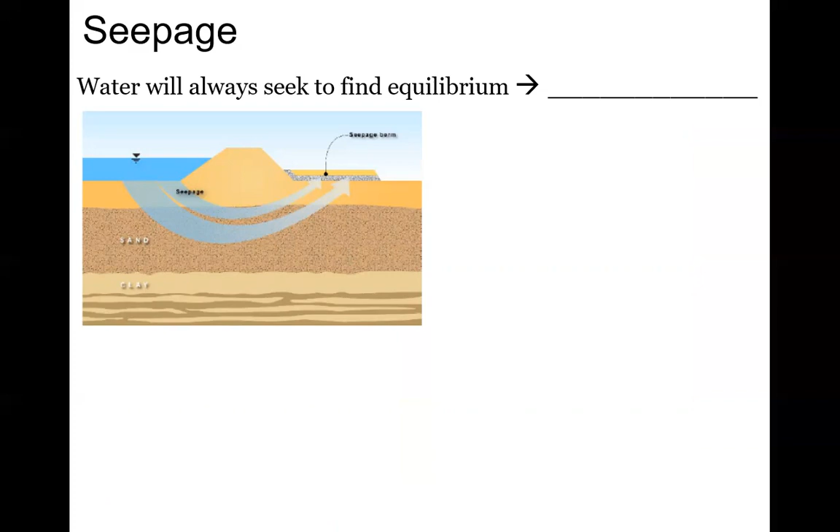So what we were talking about before the exam last week, we know that we can measure the flow of water through soil, and water will always seek to find equilibrium - it always seeks to find this hydrostatic condition.

And we talked about the seepage, the flow rate of soil using this equation. This is the flow net equation, right? And this allows us to find the Q value. The Q value is the flow rate of water.

Now you can probably imagine if we increase this flow rate too much, we would have a flow rate of water that could potentially dislodge the soil particles, right? Like a garden hose - if you spray a garden hose on the beach and the sand is super dense, or the flow is really low, it's not going to do anything. But if you increase the flow rate, then you could potentially have the migration of soil particles.

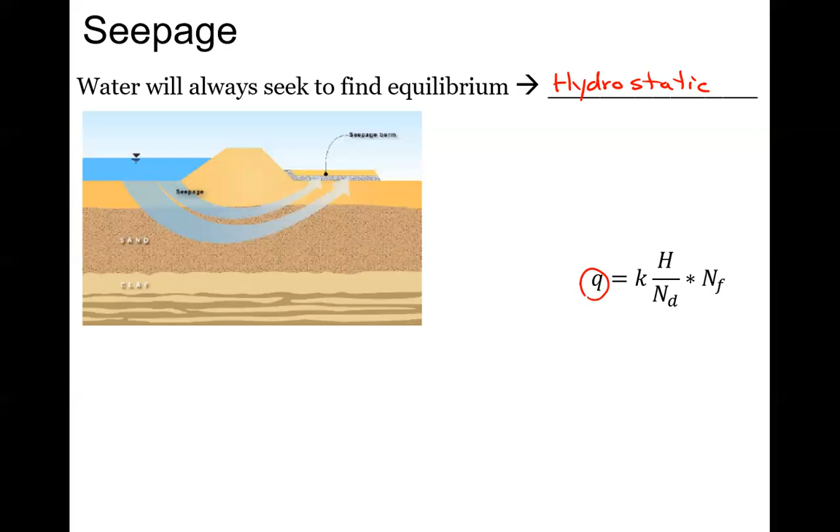So this is really important in geotechnical engineering, in terms of a few things we've mentioned before, like quicksand - even though the movie version of quicksand is different than what is actually happening with quicksand. But liquefaction in earthquakes, this is all due to the movement of water and the dislodging of particles.

There's another issue called heave, where we actually have the water stresses moving a chunk of soil along, like the weight of that is a little bit heavier, and the weight of a chunk of soil is matched by the water pressure, and we'll cover that.

But the big thing that this affects is the intergranular stress. So the intergranular stress is when we zoom in on a chunk of soil and think about the interaction of all these soil particles with each other. These little tiny chunks, almost like aggregate, are all interacting and contacting with each other, and this greatly affects the strength of the soil.

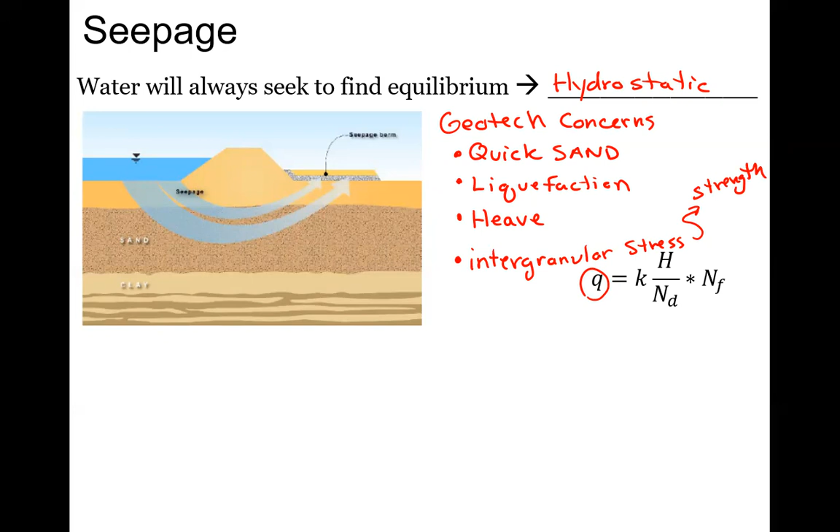So what we want to eventually do is construct something on our soil - as geotechs, we want to transfer the structural loading of a bridge, a skyscraper, a road, whatever, into the soil and through the soil. So we need to estimate the soil strength and the ability for that soil to hold whatever we want to load on top of it.

So the flow rate stuff, we've already seen that before, and that's the flow rate shown there. So we have a seepage force, and the seepage force is technically this drag force that develops at the interface between flowing water and the soil particles. We could zoom in and think on the granular level that we have a water molecule hitting a soil particle, and there's something holding that soil particle intact.

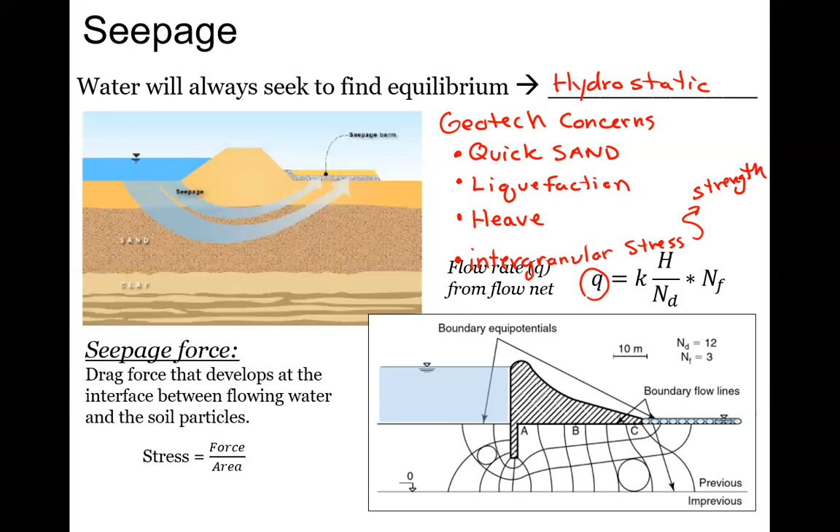So we know that seepage force, what we usually care about is stress. The question is, what is causing this soil resistance? What is causing it is intergranular stress, and we determine that intergranular stress through the in situ stress.

Think about it like trying to pick something up, like a stack of weights or just one weight, or say a book. If you have just one single book, it's easy to pick up, you just match the weight of that book. But if you had a stack of books going all the way up, that would be much heavier to pick up.

We see the same thing with soil and depth. The deeper the soil particle is, the more soil there is on top of it, the higher the in situ stress, and the more difficult it is to transport that soil particle at that depth.

Let's look at an imaginary cross section. We take Jacksonville and cut a big slice of pie down the center. We see a sand layer, a clay layer, and our little house at the surface. Let's zoom in at this little make-believe circle here.

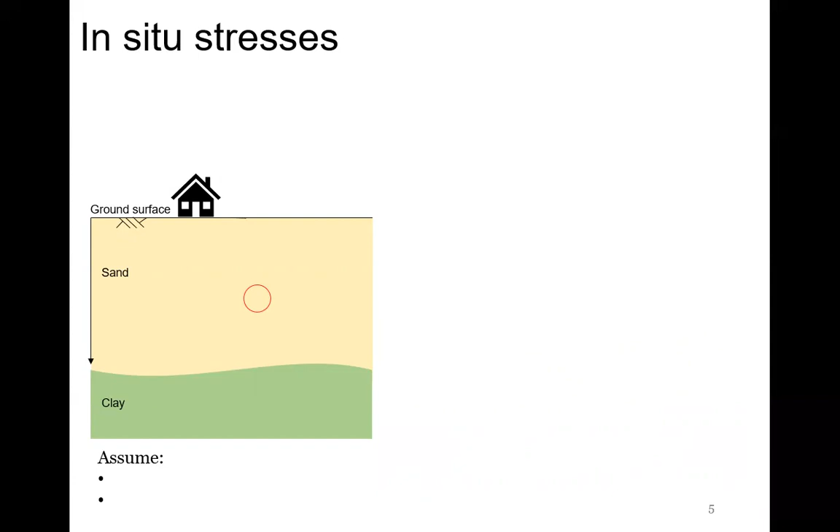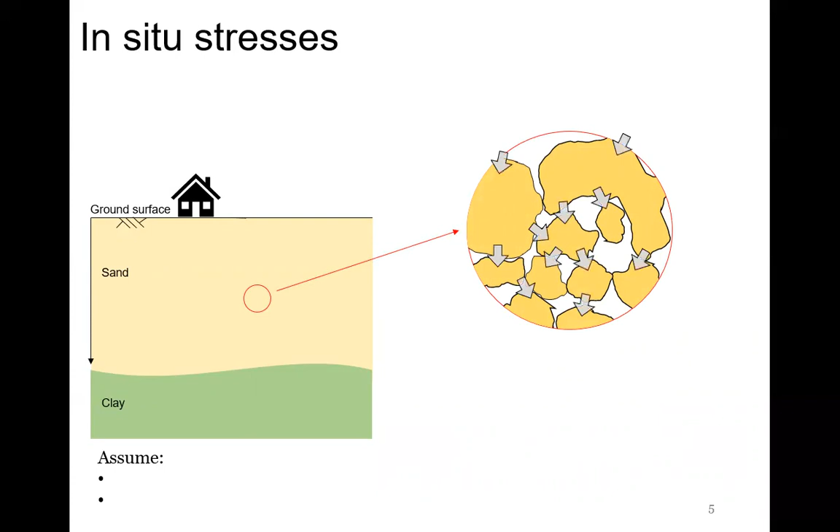Even though we picture soil on a macro scale like this, if we zoom in and look at it on a micro scale, what we'd see is a bunch of interlocking particles. This is just some arbitrary volume, let's say this circle is like a unit volume. These interlocking particles all have points of contact.

On the skeletal level, it's very difficult to analyze this stress. It's not like a method of joints or a truss where you can easily measure the cosine between all of these and do the math to determine how force or weight is transmitted from one end to the other. So most of the time we analyze the soil mass as a body.

This is the super important reason why we care about densities. Let's think about what this circle is - it's just a volume, say it's like a sphere cut out of the circle, so it's actually a 3D sense here. Let's call that sphere having a volume of 1, like 1 cubic foot or something like that.

How we determine this as a body is we look at all the things that have mass within that sphere, and knowing that density is mass divided by volume, we use that density to determine how forces are transmitted through the z direction, or through the depth direction. So we analyze this soil as a mass or a body.

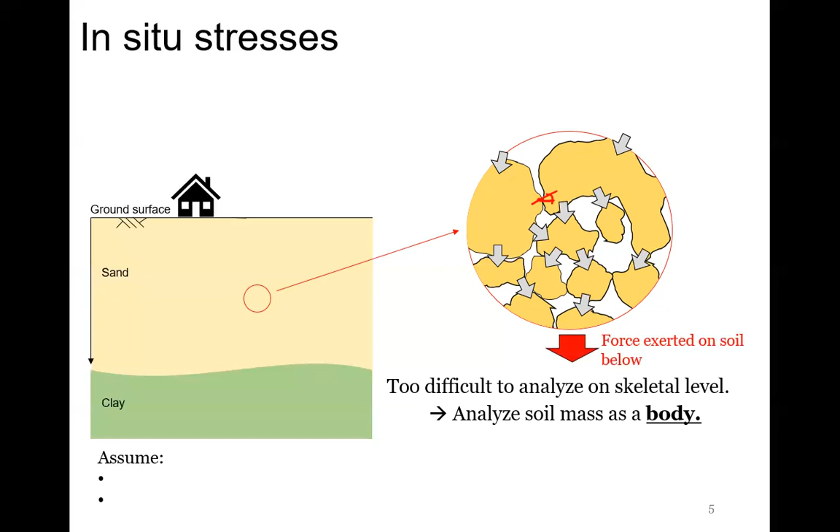We know that if we were to look right underneath it, there would be a force exerted from the amount of soil above it. And likewise, above it, there's also a force exerted from the soil above that. So instead of force, since we're engineers and we like to normalize force per cross-sectional area, we look at this in terms of stress. This is called the total stress.

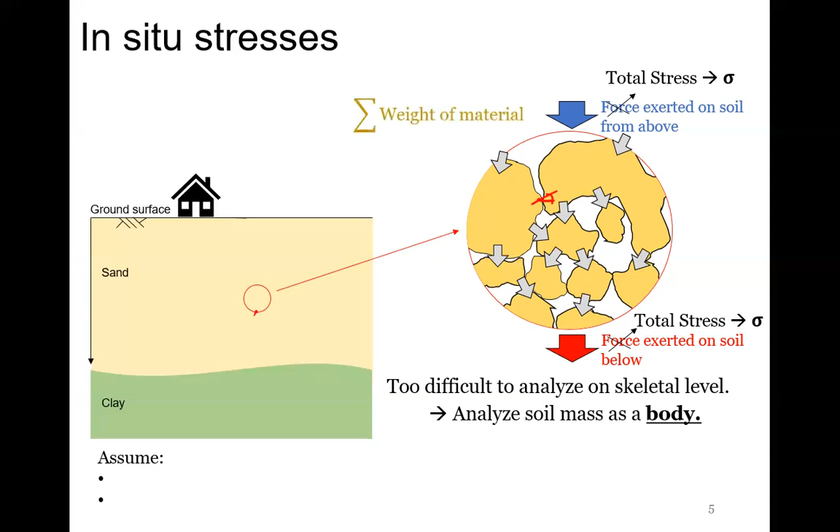Think of it like a dog pile. At this point of soil, there is a certain weight of material above it, and that is also exerting a total stress or weight of material below it. So the combination of the weight of material, if we have a volume and look at this point, we could say there's a bunch of equal circles above it causing the same exact amount of weight.

So what we actually use is the density, the bulk unit weight shown here. In this circle, we only have potentially two things that have weight: the weight of the solid, and the weight of water, if there is water. Thinking back to the void or phase diagram, air doesn't have weight. So of the three things that compose soil, the weight of the solid is one, and the weight of water is the other - that's the density.

What we assume here is that this sand is homogeneous, which means the density here is equal to the density here, which is equal to the density here, here, here. So the whole soil layer has the same consistent amount of density. And what we're also assuming here is that it's hydrostatic. Hydro meaning water, static meaning not moving. So there's no flow, there's no seepage through the soil profile.

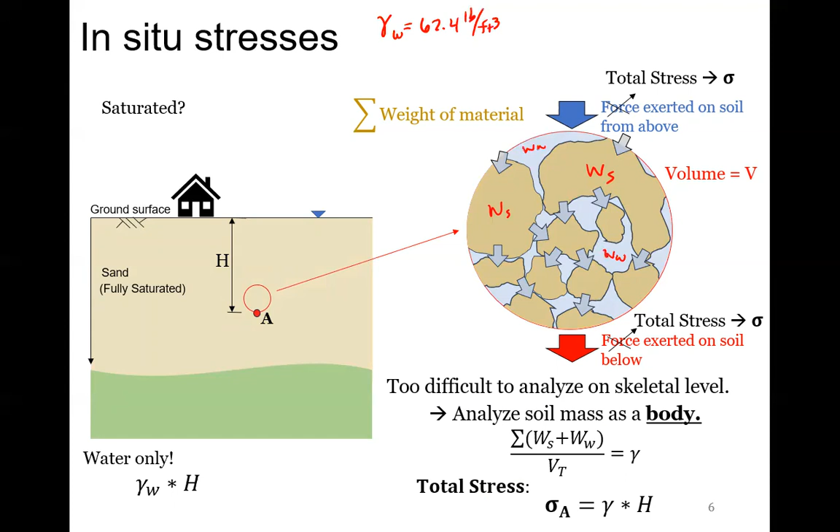So if we're looking at just the water only, the weight of water or the pressure due to water is shown by this, and it's the density of water that we know is 62.4 pounds per cubic foot times the height of the water. So if we were to remove all the soil out, this is what we call our U, or pore water pressure, and this is called our neutral pressure. And this is the same as thinking about if you swim at the bottom of a swimming pool and you feel pressure on your ears. That's what you're feeling - you're feeling the pore water pressure.

So the deeper you go in a substance, the more weight that substance is above your head, and you can feel that in your ears. Same thing that's happening here. So that's the pore water pressure - that's just the water within the pore space. Again, this only works if it is fully saturated. If we look at this water table here, if there's water above that, then we don't count it, or if the groundwater table is not to the top, then we do not care about the pore water pressure in this specific example.

So what we see is the total stress, again, is a combination of both things right here. So the total stress is everything that has mass - it could be water and solid. What we see is as the total stress increases, we should see that the pore water increases, or vice versa. So as the pore water pressure increases, then we would increase our total stress. This is kind of like the big picture of why of the stress distribution and in situ stresses.

So we have total stress so far, which is our sigma shown here. And this is the weight or the density of the soil, whatever state it is - it could be saturated, it could be dry, it could be moist, it could be any of these states. But whatever that is in that circle, multiplied by the depth or the height above, is equal to our total stress. If we only care about the water, that's our pore water pressure.

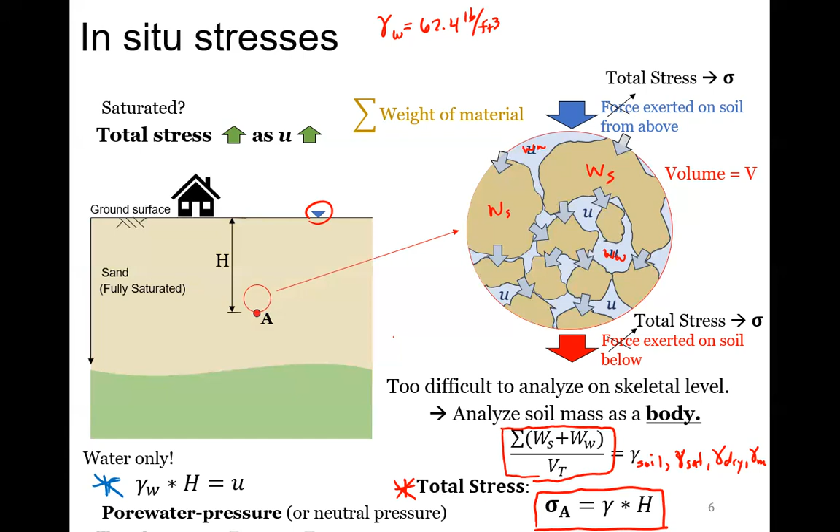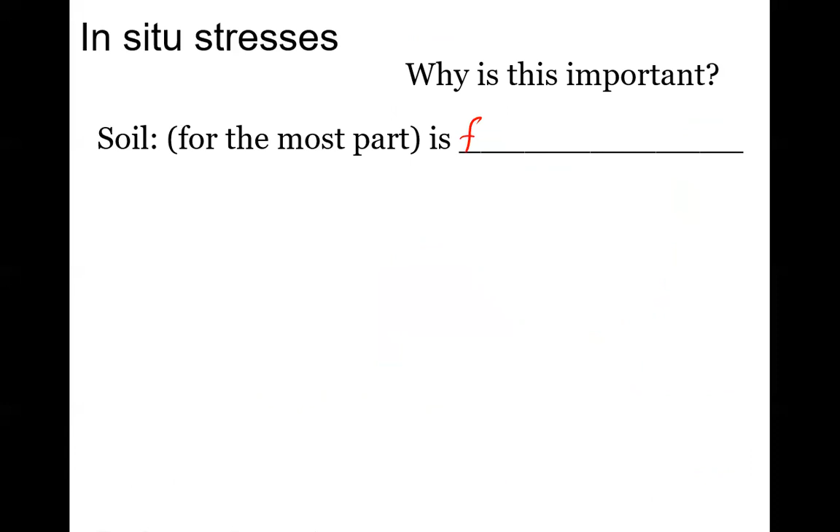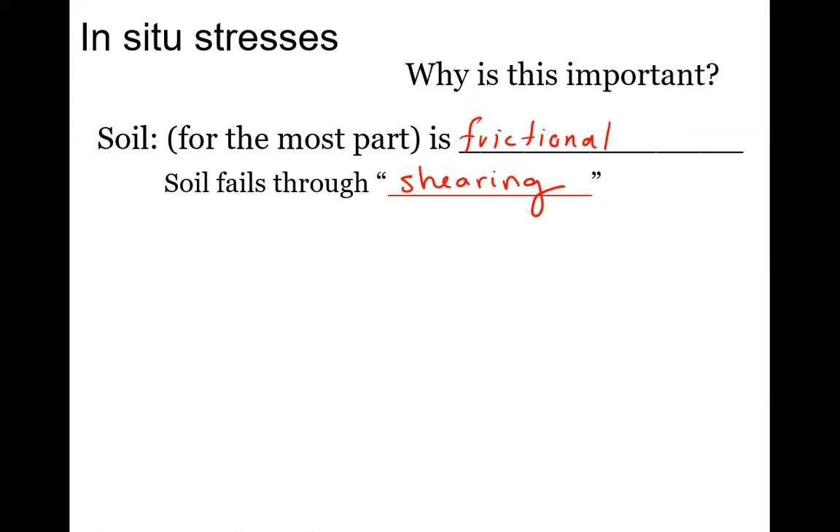So why is this important for geotech? For the most part, soil is getting its strength from friction, so we call soil frictional. That means soil fails through a process called shearing, and it's different than what we learn in structural analysis, like shearing of concrete. It's a little different - basically these tiny soil grains rolling over each other and sliding along a certain slip plane.

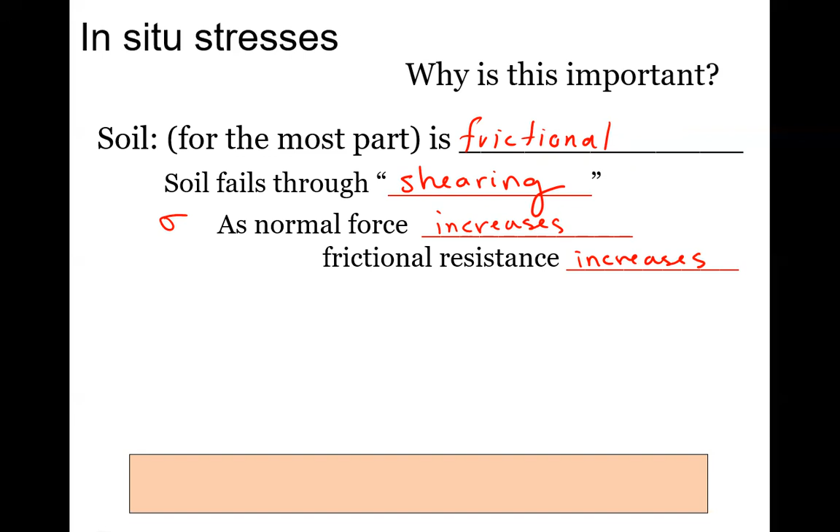So as that normal force increases - we could call this sigma - what we'll see is the frictional resistance also increases. This probably makes sense. A lot of you could picture this if you take sandpaper, for example. Sandpaper has friction on it, right? So if we had a block with sandpaper on a table and attached a string and pulled it, it's relatively easy to pull. But if we added a bunch of weight on top and increased the normal force applied, it gets harder to pull.

Because it increases the friction. If you remember from physics class, the friction force is mu, a friction coefficient, times the normal force. So if we increase that normal force, we increase the resistance due to friction. We see the same thing in soil - since soil fails in friction, if we have an increase in situ stress, then generally that increases the strength of our soil.

So as stress increases, soil strength increases. This also results in a higher load from our soil, which could be problematic, especially for tunnels. We want soil to be as dense as possible, to have higher unit weight and higher strength, but it's also applying a larger load. So if we densify an entire soil area to high strength, and 10 years later we want to install a tunnel underneath, now there's a heavier mass of soil applied to that tunnel. It's not always beneficial to make it as strong as possible.

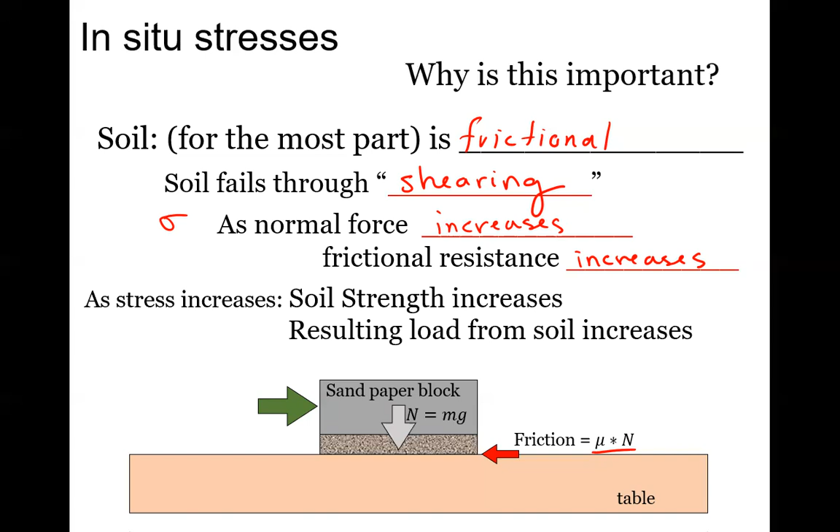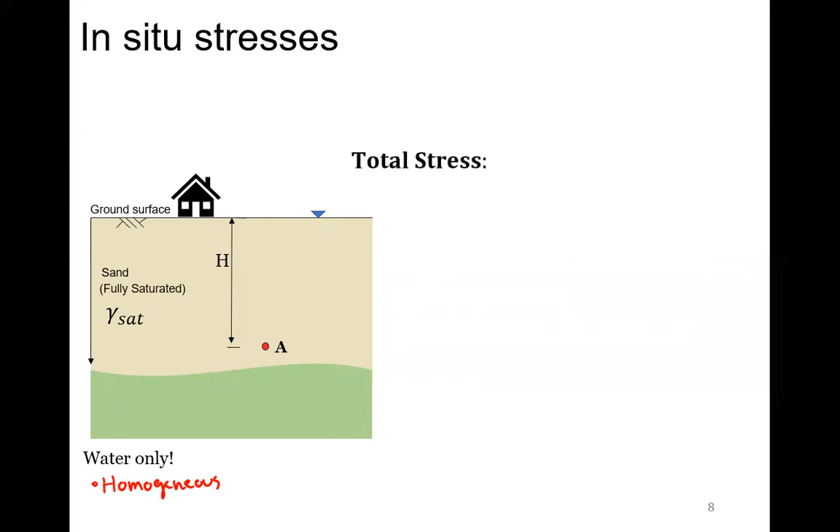So for in situ stresses, if we are assuming homogeneous soil, let's look at this example where we have water saturated soil. We could draw the profile of our total stress. In this case, our total stress is going to equal what type of density? Who could guess? Saturated, yeah.

So this would be our gamma sat, because if we zoom into a little circle we would see soil particles and also a bunch of water. So we'd see two things in our circle, and our total stress is the whole thing - this would be our gamma saturated. If we care about point A, we see H, we just multiply it by H because that's everything on top of it.

So if we draw this profile, if gamma saturated stays the same, this is just a function of H. At H equal to 0, right here, we'd have a stress equal to 0. As we go down in depth, what we'd see is a linear relationship - this is really nice. So in homogeneous soil, to draw the profile of total stress, it's just a straight line with depth, unless the density changes or something else changes, then that line might deviate and have a different slope.

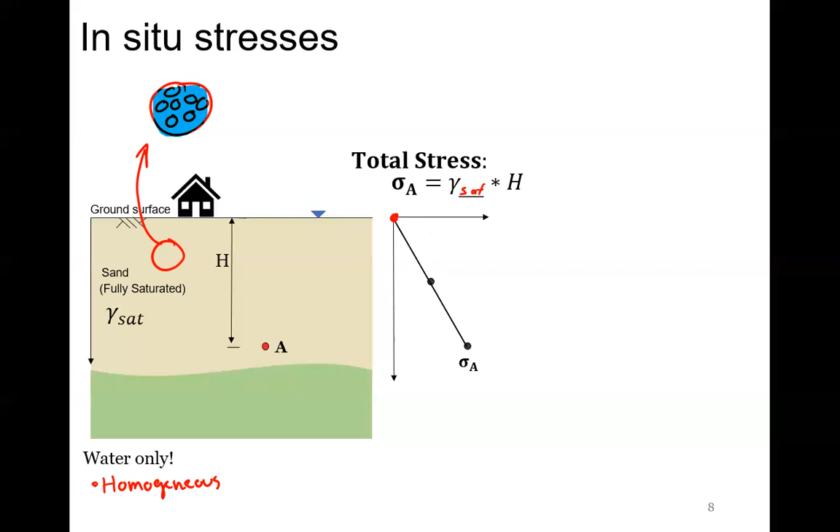So the pore water pressure, or neutral pressure, we could also draw this profile. This is shown by U - our pore water pressure. It's the same thing, think of U as being for water and sigma for soil. For that U, it's basically the same. If we draw a profile, we could measure at H, and since the unit weight of water stays the same, this is just a straight line the entire time.

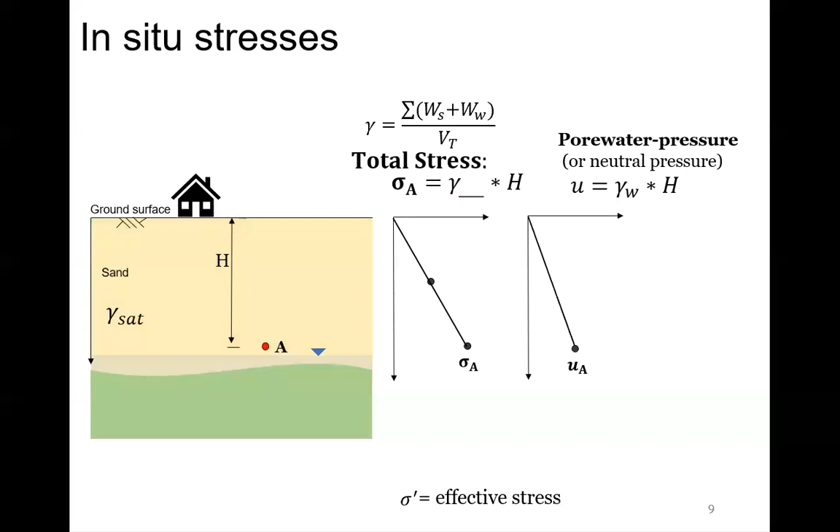So what would happen if we lowered the groundwater table like that? Now instead of our sand being saturated, we would have this as a moist unit weight, right? So now our total stress would not be saturated, it would be moist. If we were to look at this, we would still have the same amount of soil particles, but now we would have less water. So we might have a little bit of water, but it won't be saturated. Our total stress would change a little bit, but not by too much, because there's a majority of soil particles compared to water. So our total stress would change.

But what would happen to our pore water pressure at this point? Our pore water pressure will decrease, or pretty much go to zero if it's above point A, right? Because there's no standing water above that point anymore. So that means that would decrease our total stress as well, because what we're doing is we're losing the weight of water in this.

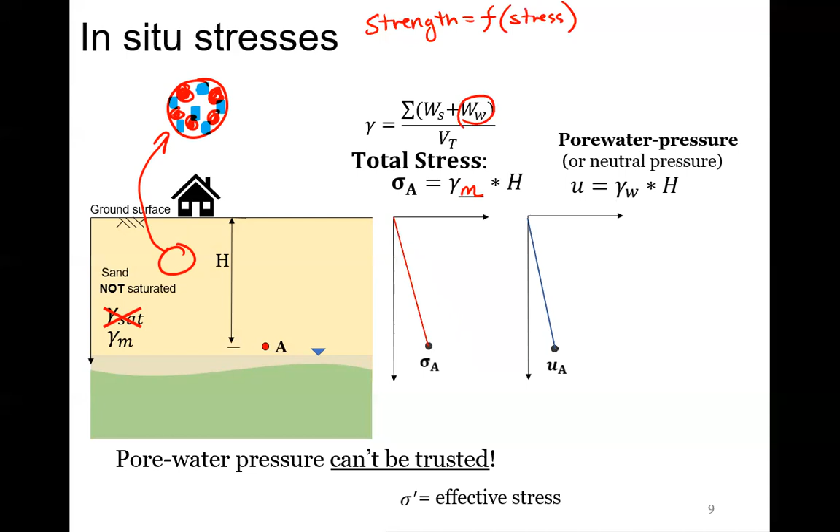So if we know that the strength of the soil is a function of our stress, and if we are estimating the strength of our soil from our total stress, and let's say we go into a drought scenario, and the groundwater table lowers randomly for a year, then we are potentially losing all of our strength, right? Because the water table is going down. We designed a certain structure to have a strength, or the soil to have certain strength from this total stress value. But in drought scenarios, we lose all that strength, and then we could potentially have failures and stuff. So this is all to say that the pore water pressure is based on nature, right?

Pore water pressure is water, and the soil, it could change throughout time. So what we do is we don't trust this when we actually do our strength calculation. So we've developed a very easy equation called effective stress, which is shown by this little prime here. And all we do is just subtract out the pore water pressure. So if we take the total stress, and we say we don't trust the water pressure because it could change through the seasons and over time, if we take that out, then what we design our strength for is our effective stress. And it's just this equation here.

So very, very simple equation, but super important, because if you are using total stress to estimate the strength and you accidentally do total stress for your calculation instead of effective stress, then you could be designing something that could fail in a drought scenario or something like that. So effective stress is super important. It's one of the most important equations in geotech, and it's one of the easiest. So that's why everyone should like geotech.

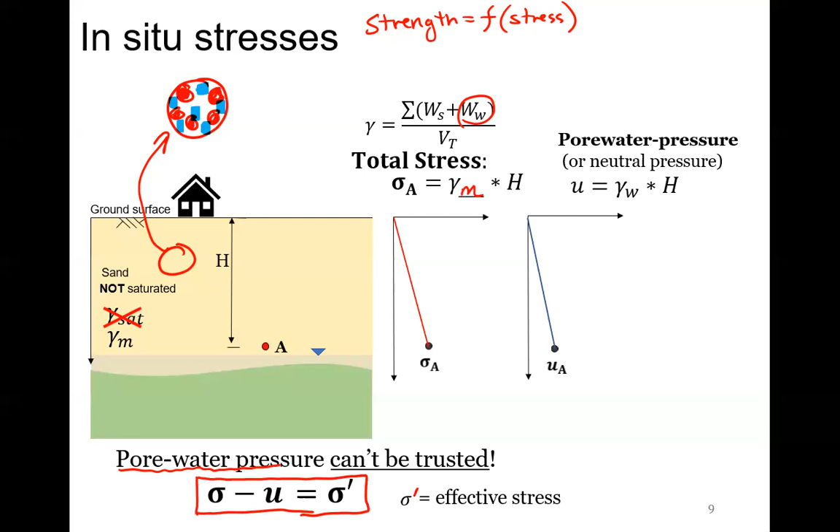So pore water pressure can't be trusted. Let's talk more about the effective stress. The effective stress is our total stress, sigma without the prime on it, which is just the weight of everything above that certain point. Just think of dog piles - whatever this point is, you have X amount of things above you, you feel that weight. And then we subtract the pore water pressure, and the pore water pressure is just the weight of the water only. So we're only looking at the water at that point. That's equal to the effective stress.

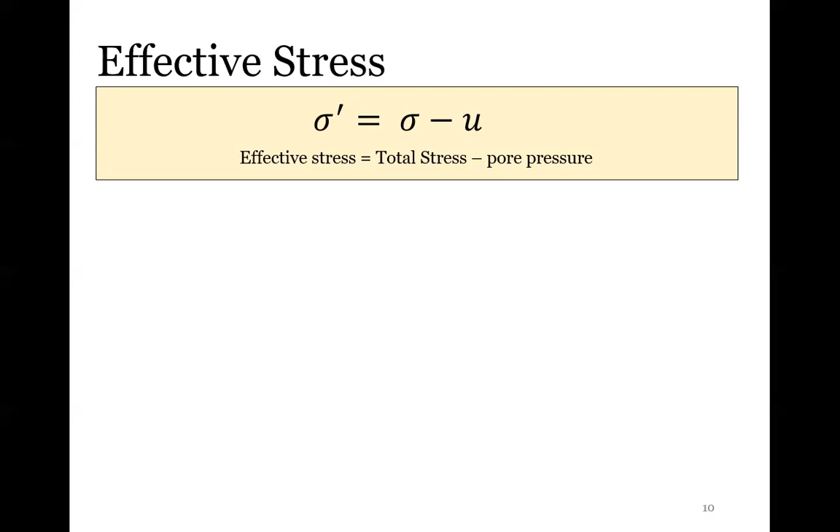So what does this physically represent? For granular material, so sand or gravel, what this actually represents is that intergranular stress, which is kind of cool. So looking again when we zoomed in at this circle of grains, what this stress is actually representing is the points of contact between everything. And that's what we want to design against, right? Because this is the thing that's actually holding our strength or our structures together. This is the points of contact that is keeping the soil from moving away when seepage force is there, or when we load it with a structure or something like that. And there's a lot of work that's actually gone into looking through this, and we see how the pore water pressure within this adds to this benefit, which is why we take that point away. So we don't design, because this groundwater table, this pore water pressure can change, we don't want to design our strength with this.

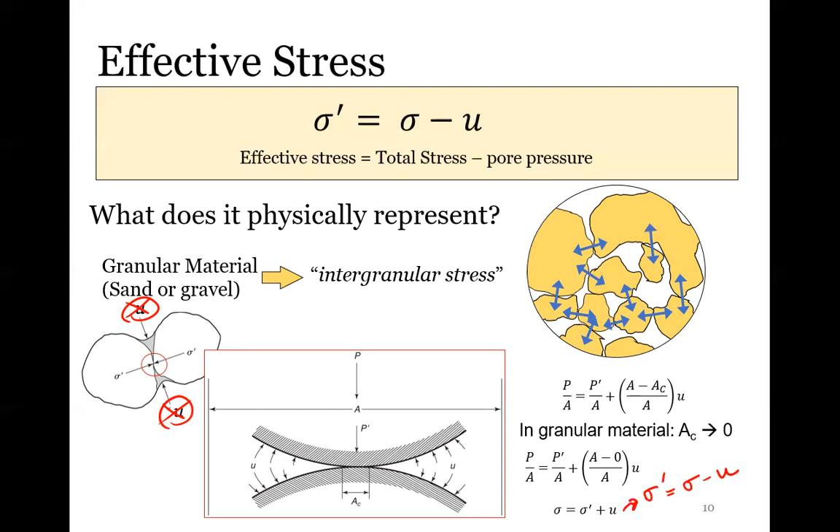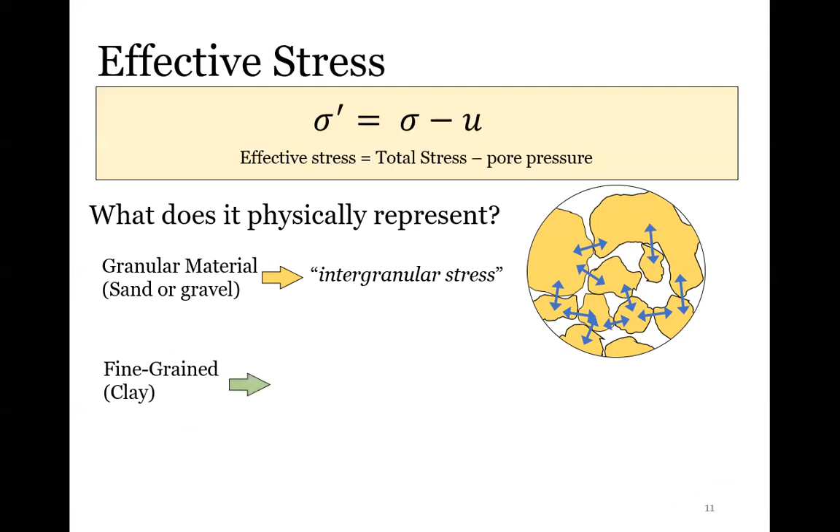You might be asking, okay, well what about fine grained soil? So for fine grained soil, clay, if you remember when we talked about this, the clay particles don't actually ever physically touch. They look like little accordions together, and there's all these small interactions of forces that actually have these things suspended. That's how we get our cohesion, that's how we get the plasticity and all those fun things. But then how is force actually transferred through everything if the mineral structure doesn't physically contact?

And the question is, they don't actually know. There's actually been a lot of empirical studies back in the 60s that have determined that this effective stress relationship still checks out, even though there's no physical phenomenon where we can actually track the statics through everything. So this is a big area of research. Effective stress parameters in clays are still used, but they're almost over conservative. If you're interested in the material science side of things, this is a big area that is currently still being researched, because it was only until the 60s that they determined that it checks out. But there's a lot of verification still in this realm.

So what we know is this effective stress parameter is good for all types of soil, and that's what we're going to assume here. For sands and for clays, we will always use the effective stress instead of the total stress. So it's important to calculate it.

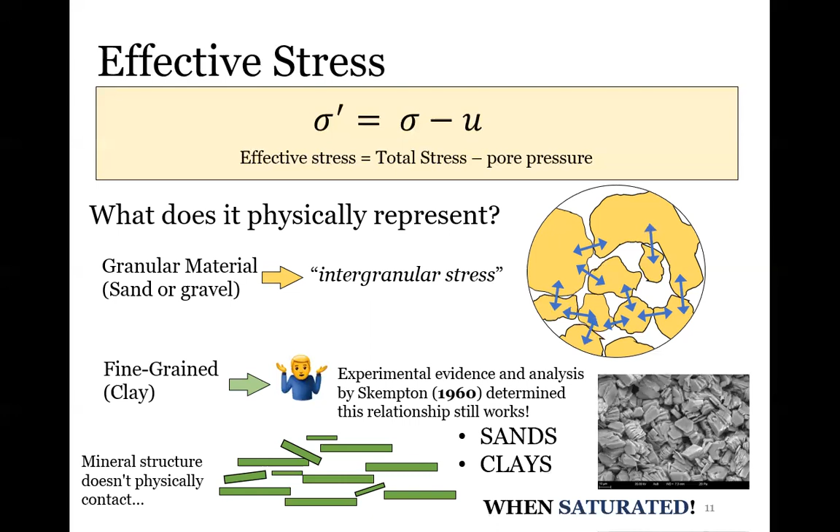So let's look at an example of calculating the in situ stresses. When we say in situ stresses, generally what we will always talk about is our total stress, our pore water pressure, and then our effective stress. So these are the things that we care about. It's easy to calculate the total stress, it's easy to calculate the pore water pressure, and then we want to calculate the effective stress from that.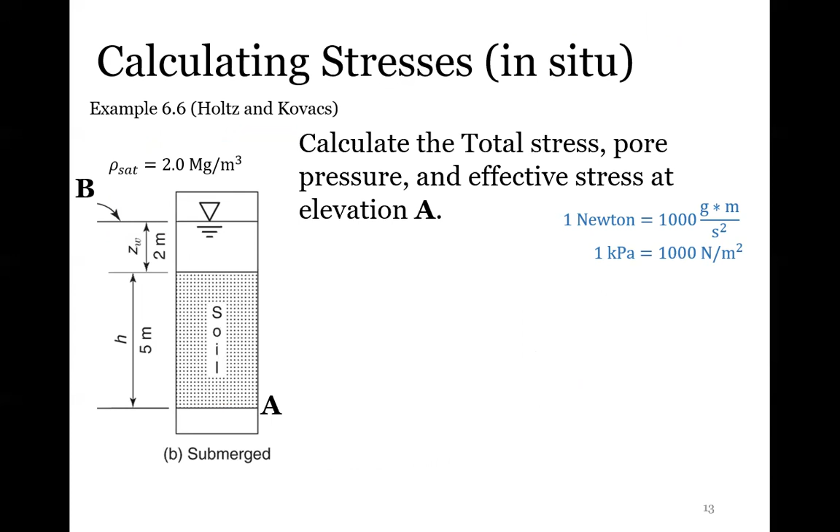So let's look at a different example then. This time we have the water table all the way up here. So now we have standing water up here.

Our total stress is going to be from everything that has weight above us, right? So if we're hanging out right here at point A, our total stress is going to be from the soil. But if you were sitting and trying to hold up at point A, what else would you have above you? You'd have the weight of the soil as well as those 2 meters of water you have to hold up too on your plate. So we also have to add this extra amount. This is where total stress comes in, because any structural loading, any potential of a structure being on top in the future, is included in this total stress.

So for this, the density of water being 9.81 kilonewtons per cubic meter times 2 meters, and we see this all checks out here. This means now our total stress is 117.7 kPa.

So our pore water pressure, this is only the weight of the standing water above us. So if we were to remove all this soil, let's just say we remove all the soil, how much water would be above us? Who thinks 2 meters? Who thinks 7 meters? Who thinks 0 meters? Who thinks they want to go to sleep? If we remove all this soil, how much water would be above us at point A? What would be the height of water above us?

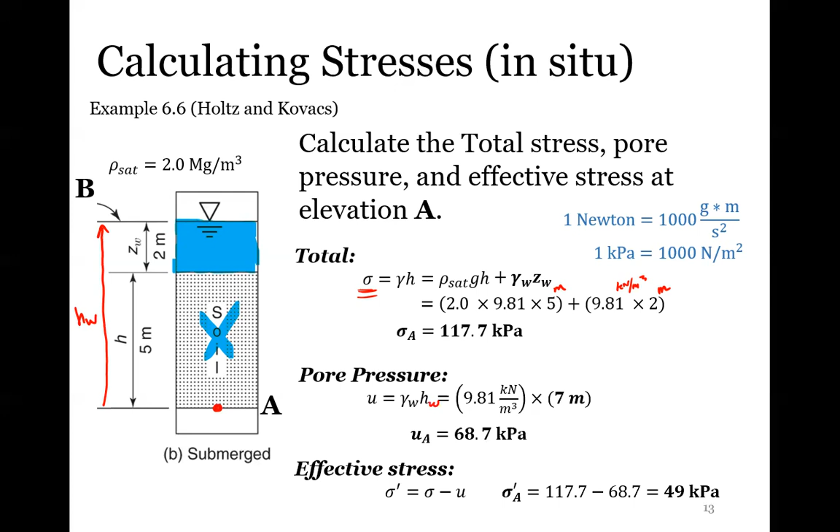So our effective stress is just our total stress minus that pore water pressure. And what we see in this case is it is 49 kilopascals. So we actually change our effective stress in this case, which is why we would need to design against our effective stress. We are lowering the amount of stress that's being applied. So if we compare these two, on the right we see that we have these values here, 117 minus 68.

And then the one on the left, we see how just the increase of groundwater table is going to change our effective stress. Although it increased our total stress, which might give us an idea that there is more strength since we have that extra water at the top, we actually see a decrease in effective stress. So that's why we always have to design for effective stress.

So this is from example 6.6, you can go through that in a little more detail. What's important too is that these are all hydrostatic, so these are just snapshots of where the groundwater table is staying where it is. But over time, we know that there could be a change of groundwater table where it will actually rise or fall, and that induces different pore water pressures, which we'll talk about here in a little bit.

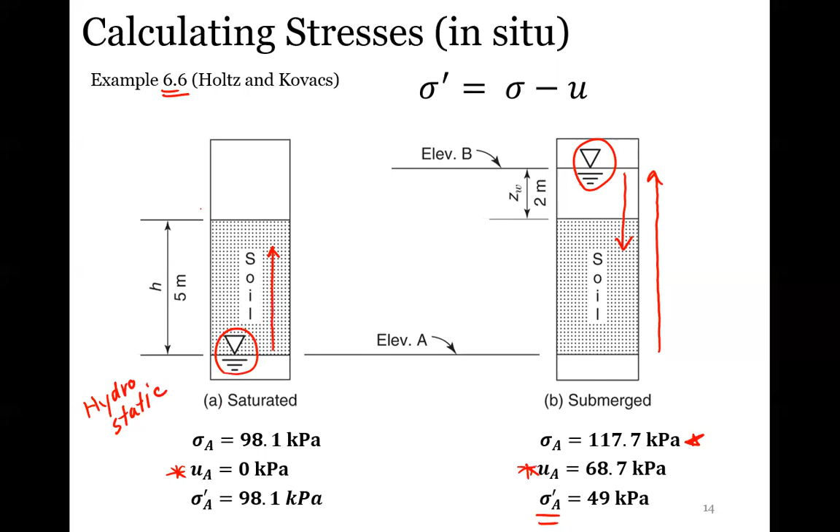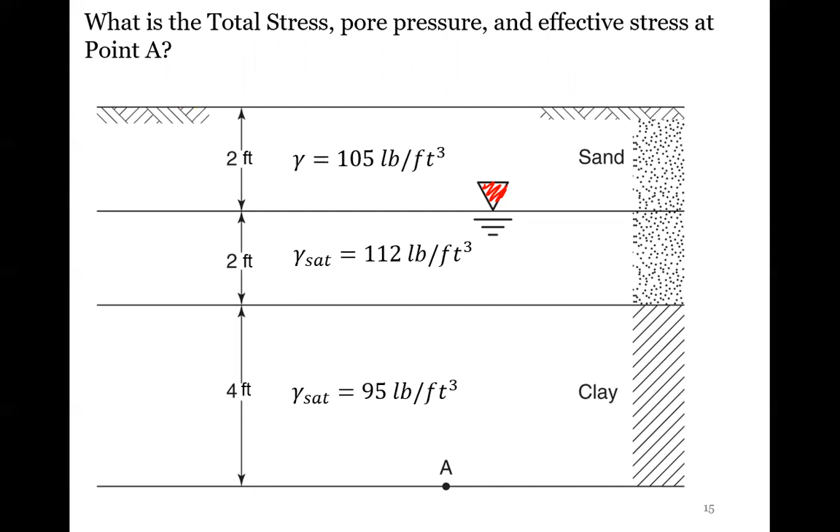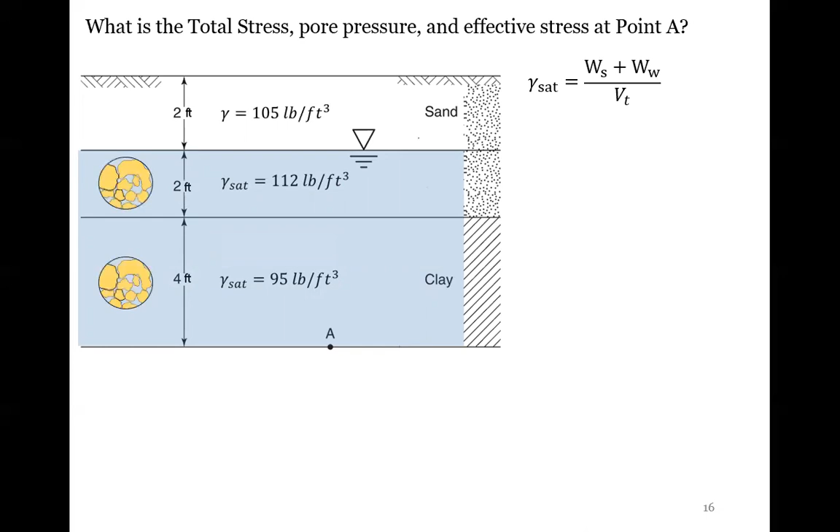So let's look at this example. Remember, we always first need to identify where the groundwater table is. Ideally, if you need to color it blue or whatever, just know that the water is only going up to that point. The saturated density has the weight of the solid plus the weight of water in it. So if we were zooming in and looking at that, we're looking at that weight here, this WT. That's everything that is in this mass.

So first, what we can do is find the total stress at point A. Total stress is our sigma, our pore water pressure is our U, and our effective stress is our sigma prime. So total stress at point A is everything that has mass over it. Starting from the bottom, we have 4 feet of something that weighs 95 pounds per cubic foot. Above that, we have 2 feet of something that weighs 112 pounds per cubic foot. Above that, we have 2 feet of something that weighs 105 pounds per cubic foot. Adding all of these sections together, our total stress would be 814 pounds per square foot. So if you were hanging out down here at point A, you would have to hold up this much pressure at this point.

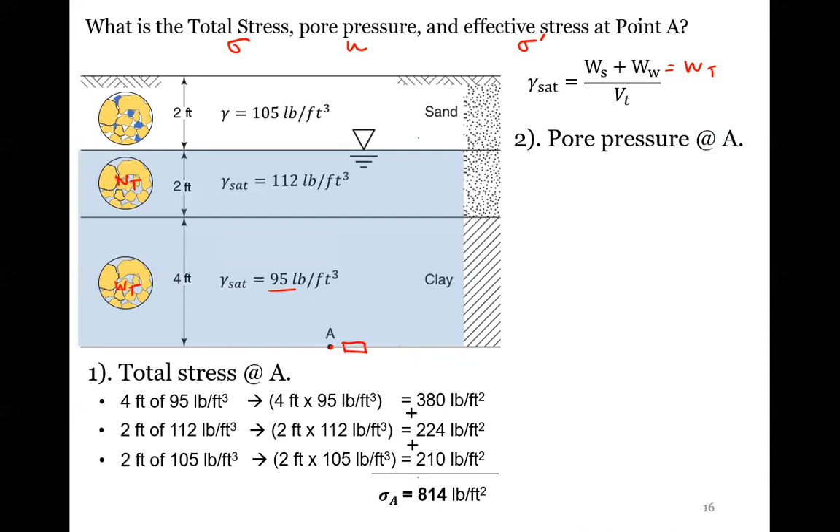All right, so the pore water pressure, we're still looking at point A. Now we care about the weight of water above us, so U is the weight of the water overhead. The density of water we're assuming is 62.4 pounds per cubic foot. The weight of water above us, we have 6 feet, because we don't care about the soil layers, we're just looking at the water. So this would mean our pore water pressure at point A is 374.4 pounds per square foot. So our effective stress at point A, we just subtract these things because we can't trust that water, and we get 439.6 pounds per square foot.

So this is again a hydrostatic condition. What would happen if we had a change of groundwater table? Then we wouldn't have hydrostatic anymore. Let's say that this weight of water overhead now means something a little bit different. Let's say at point A here we have a downward gradient. Remember when we were talking about permeability, we have a change of head from one side of the soil to the other, so we have flow from that higher head to a lower head.

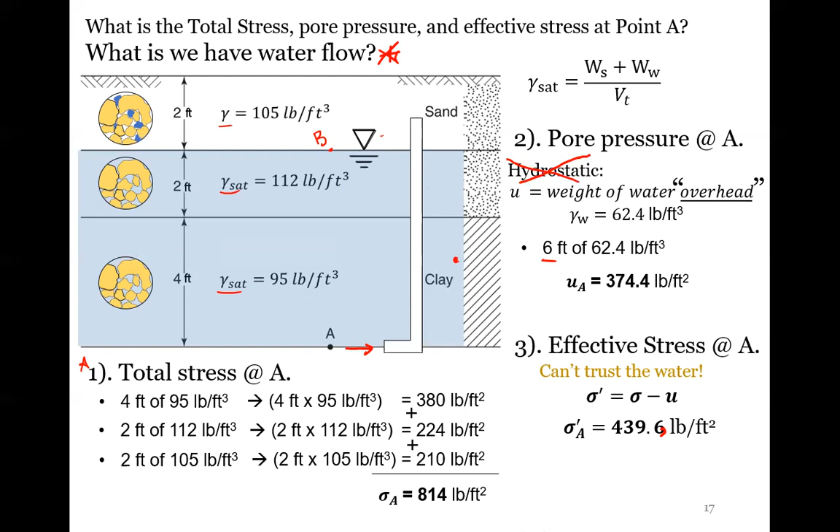So let's say right here we have this downward flow, which would mean the pressure head at point A is lower. So if we care about the pore water pressure at point A, now we would have a lower value. We'd have this HW being a smaller value than its original value of 6 feet. So this pore water pressure would change, and now we're going to lower it. UA will lower because instead of 6 feet, we would have whatever this is, let's just say 3 feet or something. So we're multiplying that head by something different. So if our pore water pressure lowers due to downward seepage, how will that change our effective stress?

We are subtracting something by a smaller number now, so this number will go down and we will actually see an increase in effective stress. Think about this from the granule level: effective stress is the connection point between soil particles. If we have water flowing vertically and pushing on these soil particles, there's going to be more contact between them, because with downward seepage, the water molecules are hitting the soil particles and squeezing them together a little bit more. So it makes sense that our effective stress will increase.

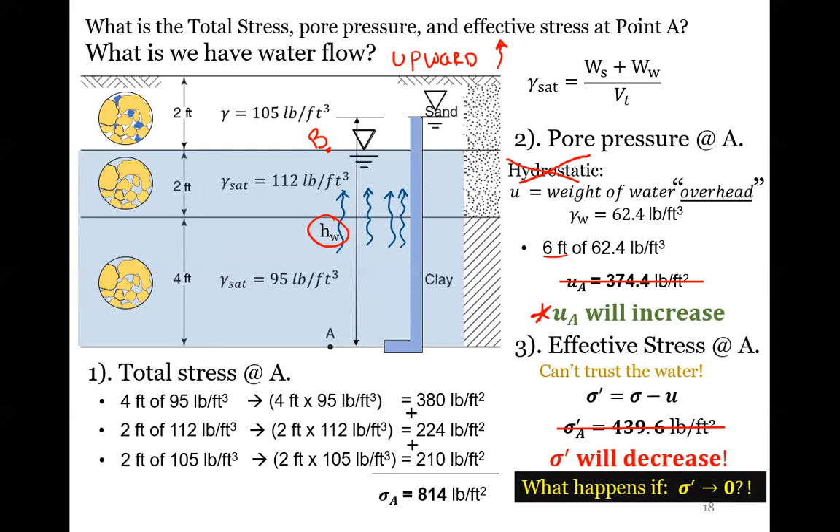What would happen if this value, our sigma effective stress, goes to zero? We'll talk about that. If this stress goes to zero, if these interlocking particles go to zero, what do you think might happen?

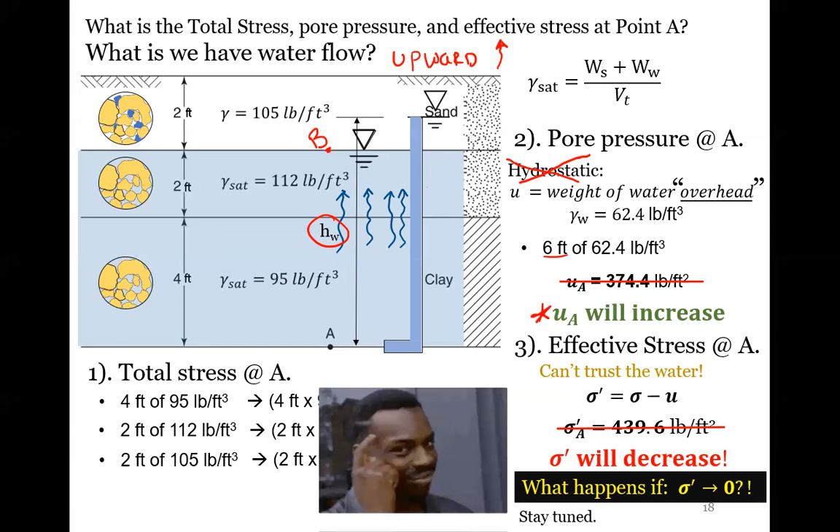Okay, so let's look at more examples of hydrostatics. The groundwater table is at the surface, so let's move all the way up here. Now we have a saturated value, so let's just say it's equal to this.

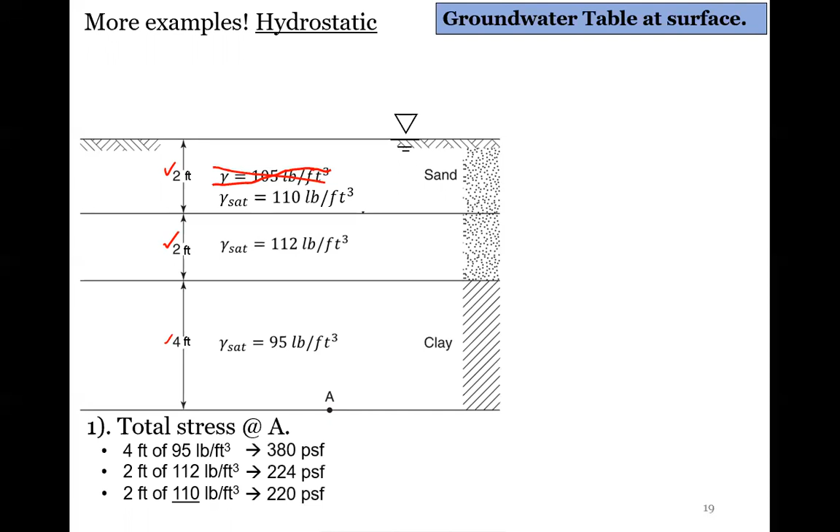So total stress at point A: we add everything up above us. We have 4 feet here at 95, we have 2 feet at 112, and now we have 2 feet at 110 since this is saturated conditions. Our total stress is the combination of all of that: 824 pounds per square foot. Our pore water pressure at A, if we were to stick a straw down here and measure the height of water, we would see 8 feet of water flowing up to the top, so 8 feet of head. With 62.4, this means our pore water pressure is 499. So our effective stress, we subtract these two and we see 325 pounds per square foot.

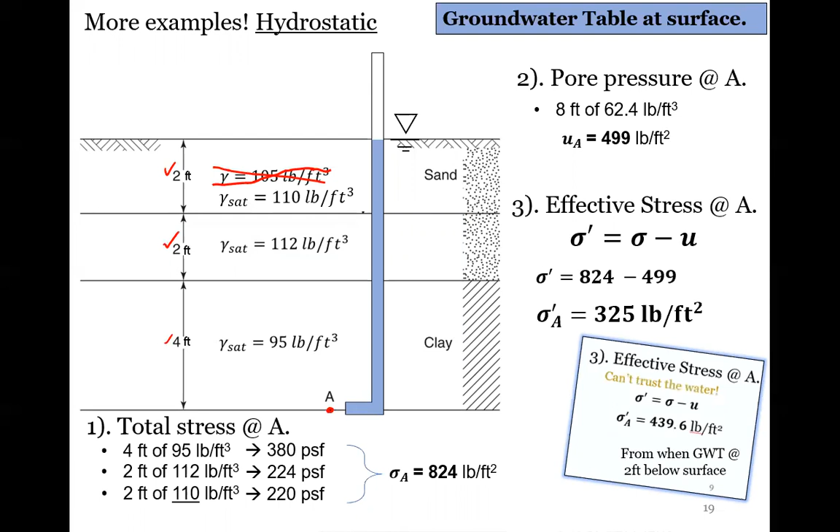So we see that our effective stress is decreasing because we're still increasing our water. This is from before, when our groundwater table was 2 feet below the surface. Let's say now the groundwater table is at the surface and more floods come, and it just starts raining a lot, and now we have standing water above our soil here, so we have lake conditions. Let's say we have 3 feet of this, with little fishies swimming around. So this is all just standing water, and we still have saturated conditions all the way through.

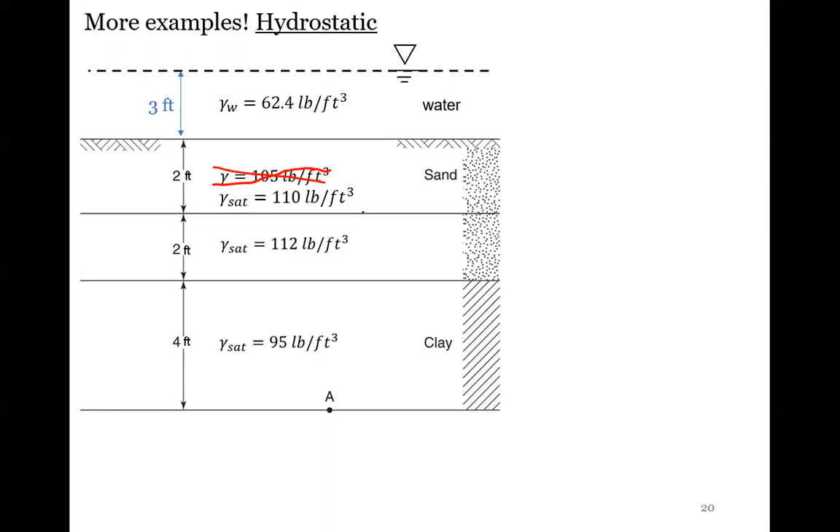For our total stress, what we show is that this is a material that's 62.4 pounds per cubic foot, because that's the weight of the water. So our total stress now still includes this layer and this layer, but we also need to include the weight of the water above us, since this weight of water is still pushing down at the ground surface. This is something that still needs to be held up at point A.

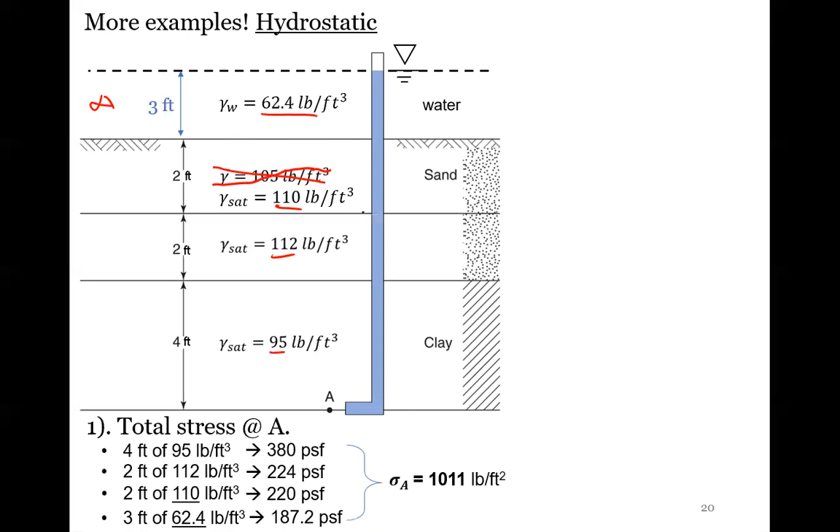So now what we see is our total stress is increased drastically at 1,000, and the pore water pressure at this point is higher too, so it increases as well. So now we have 11 feet of water, and this is at 686 then.

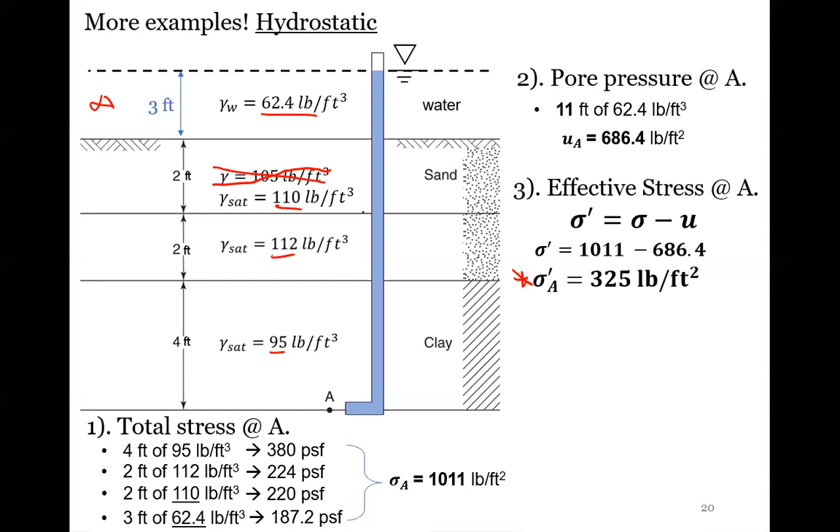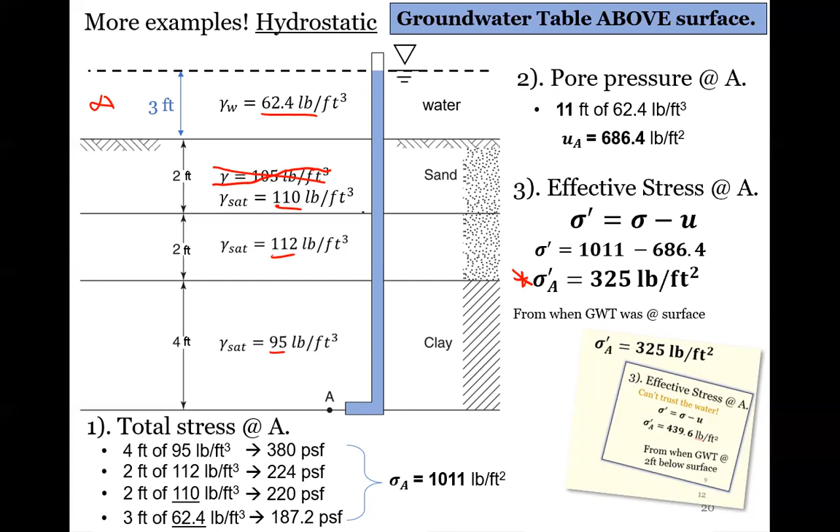So our effective stress is actually the same. We subtract the total stress minus the pore water pressure, and our effective stress value is staying the same compared to when it was at the groundwater surface. So as flooding comes and as we increase the groundwater table above our surface, so we get standing ponding water, we actually see that the effective stress at a point below the surface doesn't change. So there's some trends here that we can recognize, in situ stresses and the groundwater table.

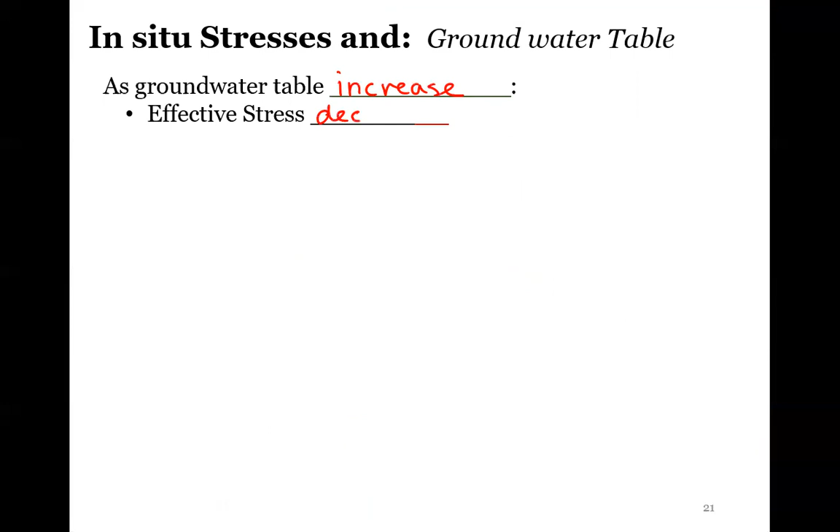And these are all in hydrostatic conditions. Let's say as the groundwater table increases, so as the seasonal groundwater table rises, what we would see is the effective stress decreases. Think about the equation, what is actually happening here. With this equation, we're not really changing sigma too much, the change of total stress doesn't change that much because the majority of the soil is weight of solid. But what we're doing is increasing the pore water pressure. So if we increase the pore water pressure, we are subtracting a higher number from our total stress, which causes a decrease in this value.

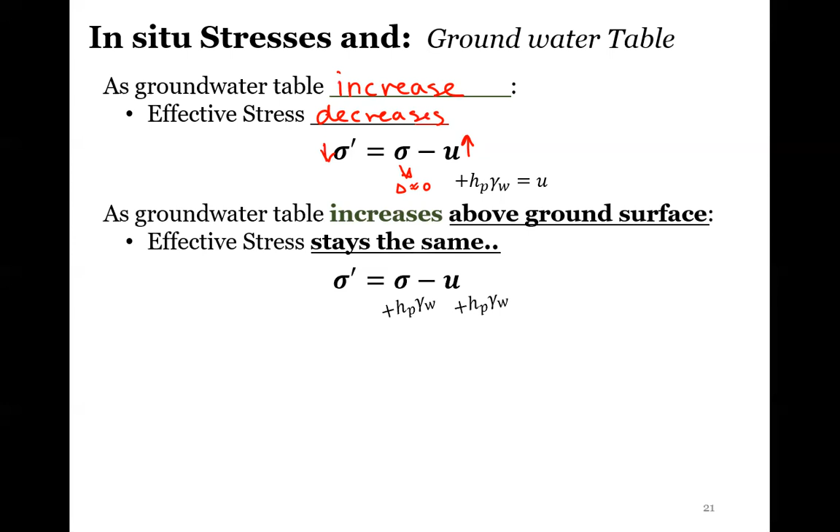But as the groundwater table increases above the ground surface, the effective stress stays the same. Looking at our equation again, we would still increase this HP times gamma, but we would actually add the same exact thing to our total stress, since this is an additional thing we have to hold up at point A or at whatever point we care about. So as the groundwater table is increasing through the soil, the effective stress is decreasing, but as soon as we get above the ground surface, it stays the same. The effective stress stays the same, since the increase in pore water pressure is equal to the increase in total stress, so our effective stress actually doesn't change.

So as the groundwater table decreases, adversely to the first point, we would see the effective stress increases. Think of this as the intergranular stress. As our effective stress increases, the soil strength will increase, which is generally good, but the resulting load from the soil increases, which means the pressure on the soil increases. So think of it this way: if we have a soil structure like this, and we increase the effective stress so much, we just keep increasing it, what we could actually see is compression of our soil. And I didn't include that slide, but for next class we'll go over this. This can actually cause settlement.